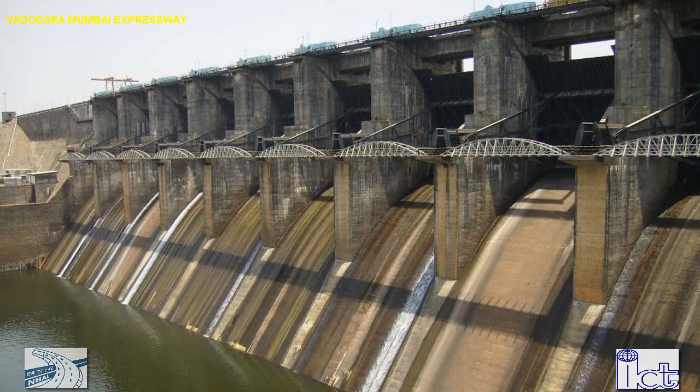Dadra Nagar Haveli is a union territory with immense tourism potential. It has in the vicinity the Madhuban Dam and Dudhni Lake, famous for water sports, and garden Van Ganga, popular with filmmakers.

Surat in Gujarat is at the heart of the world's diamond polishing industry, contributing billions of dollars to the Indian GDP, and houses many industries like Kribhco's mammoth fertilizer plant, Reliance petrochemical plant, Essar's 10 million ton steel plant, L&T's heavy engineering unit, gas processing plant of ONGC, etc.

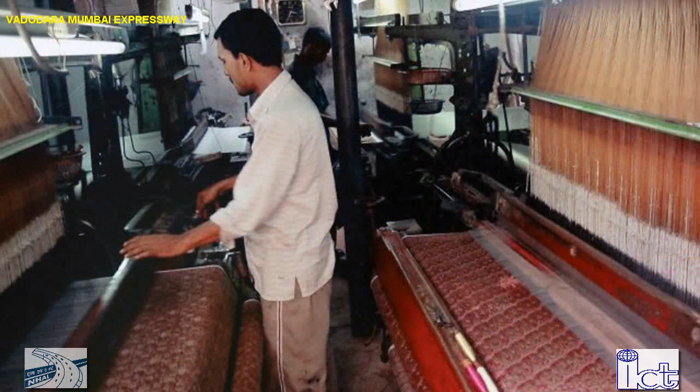Bharuch is a heavily industrialized city and is renowned for its textile mills, chemical plants, long staple cotton and dairy products. Gujarat's biggest liquid cargo terminal is situated here. It also houses many reputed multinational companies like Videocon, BASF, Reliance, Welspun Stahl, etc.

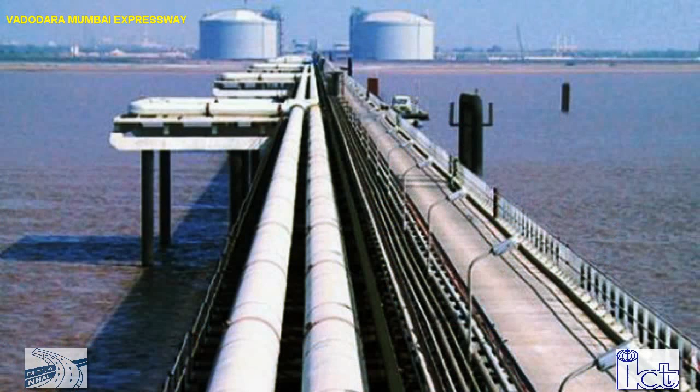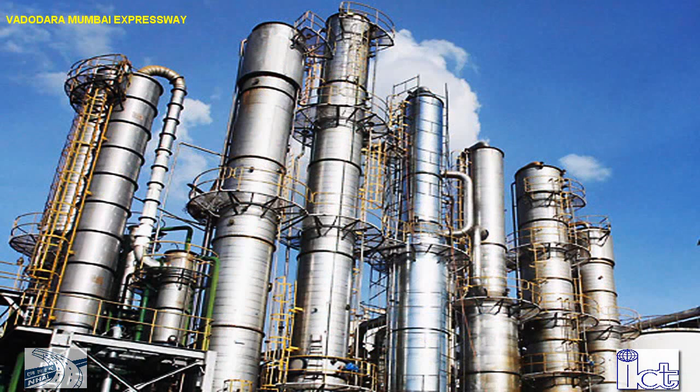Vadodara is a major hub of petrochemical industries in the country. It houses the Gujarat Refinery of IOC, the Gujarat State Fertilizers and Chemicals and Indian Petrochemicals Corporation Limited. Ahmedabad is a thriving centre for chemical and pharmaceutical industries. Two of the biggest pharmaceutical companies of India, Zydus Cadila and Torrent Pharmaceuticals, are based in the city.

The Jawaharlal Nehru Port, which is the largest container port in the country, is located here. The Dahej Port is an all-weather port with a capacity to handle 22 million tons of cargo per annum, which is being further expanded. The industrial activity in this busy region is all set for a major impetus with the planned Delhi-Mumbai Industrial Corridor. Delhi-Mumbai Industrial Corridor has been conceived as a model industrial corridor of international standards, with emphasis on expanding the manufacturing and services base and developing it as a global manufacturing and trading hub.

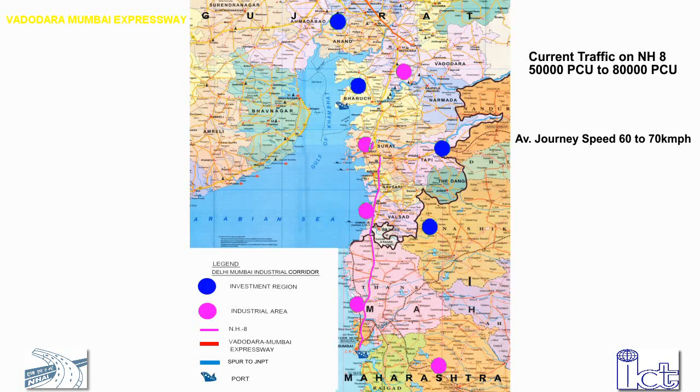In this major industrial hub, NH8 connecting Delhi with Mumbai is the principal arterial carrying bulk of the traffic. The current traffic on NH8 between Mumbai and Vadodara is in the range of 50,000 to 80,000 PCUs with an average journey speed of 60 to 70 km per hour. The NH8 is not access controlled and is operating at level of service B or below even after widening to 6 lanes. With the planned industrial development in the region, the traffic on NH8 is expected to grow manifold, and hence the region will need an alternate route to carry large volumes at high speeds.

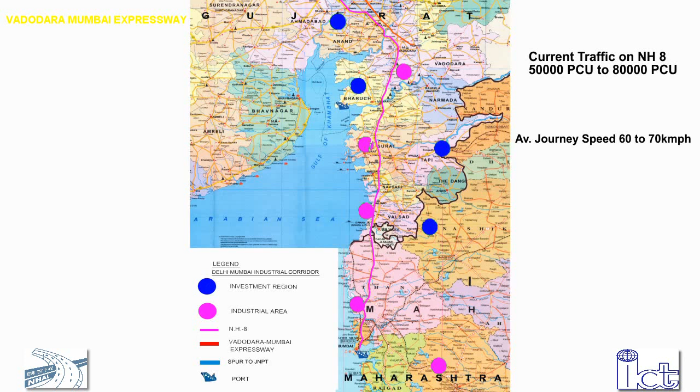To this end, NHAI is planning to build the Vadodara-Mumbai Expressway along with spur to JNPT under NHDP Phase 6. The alignment of the expressway and spur passes through Thane and Raigad districts in Maharashtra, Union Territory of Dadra Nagar Haveli, and Valsad, Navsari, Surat, Bharuch and Vadodara districts of Gujarat. The alignment in Gujarat is mostly within the 600-meter corridor frozen by the government of Gujarat for the expressway.

The alignment of the spur is in conformity with the outer alignment recommended in the Comprehensive Transport Study conducted by Mumbai Metropolitan Regional Development Authority, and the alignment has been approved by Government of Maharashtra. The spur connects the main expressway to JNPT and Mumbai-Pune Expressway. Therefore, the traffic bound for JNPT and Pune will ply on spur and not enter the Mumbai city, reducing both traffic congestion and pollution in the city. The expressway with spur is linking already existing Ahmedabad-Vadodara Expressway with Mumbai-Pune Expressway and thus will provide expressway connectivity from Ahmedabad to Pune.

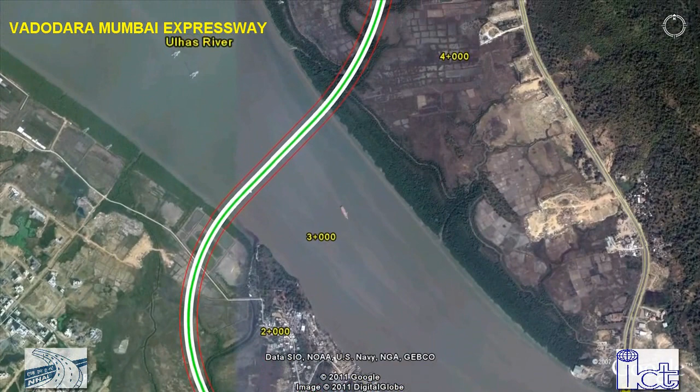The proposed Vadodara-Mumbai Expressway is 379 km long and its alignment is parallel to NH8. It starts from kilometer 499 of NH8 in Dahisar and traverses the Mira Bhayandar municipality before crossing Ulhas River at kilometer 3.0 in Thane district. The length of main expressway in Thane district is about 112.8 km.

It passes through dense habitation in Vasai from kilometer 16 to kilometer 21. Though a 100-meter corridor has been earmarked for the expressway in the master plan of Vasai, developed by CIDCO, large-scale encroachment has happened in the earmarked right-of-way and there may be considerable public resistance to the project in this section. The connection to Vasai is provided through an interchange on Vasai-Virar Road.

The spur to JNPT takes off at kilometer 27 and the expressway crosses river Vaitarna at kilometer 31. The alignment then moves parallel to Vaitarna river, avoiding the reserved forest on both sides. It crosses Vaitarna river again at kilometer 45 and thereafter moves parallel to Surya river before crossing it at kilometer 68.

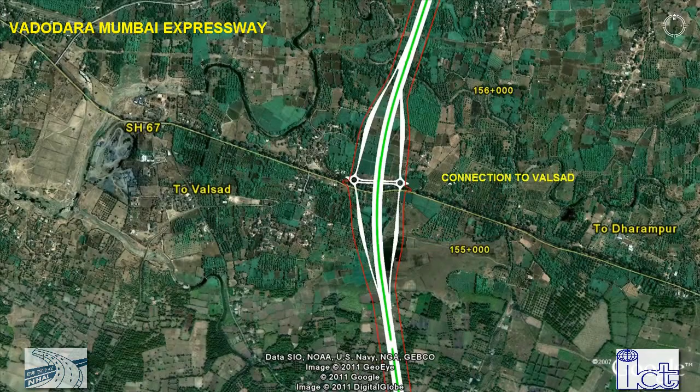The alignment again enters Valsad district at kilometer 124 and bypasses the town of Vapi on its east side. The total length of the expressway in Valsad district is about 48.6 km. The alignment crosses Par River at kilometer 149, about 2 km east of the existing bridge on NH8. Alignment thereafter moves parallel to NH8 on its eastern side and crosses Valsad Dharampur Road in kilometer 156. A diamond type interchange is proposed at this crossing to provide access to Valsad town and the adjoining area.

The alignment crosses Auranga River at kilometer 159, about 4 kilometers east of existing bridge on NH8. Alignment thereafter moves away from NH8 and enters Navsari district at kilometer 167. The total length of the expressway in Navsari district is about 37 kilometers. The alignment crosses river Kaveri at kilometer 178, just a kilometer east of Chikli town.

The alignment thereafter moves just about 1 to 1.5 kilometer east of NH8 and crosses Gandevi Tankhal Road at kilometer 190. An offset type interchange is proposed at this location to provide access to Navsari and adjoining region. The alignment crosses Ambika River in kilometer 193 and moves further northwards and crosses Purna River in kilometer 205. Thereafter, the alignment enters Surat district and the total length in this district is 57 kilometers.

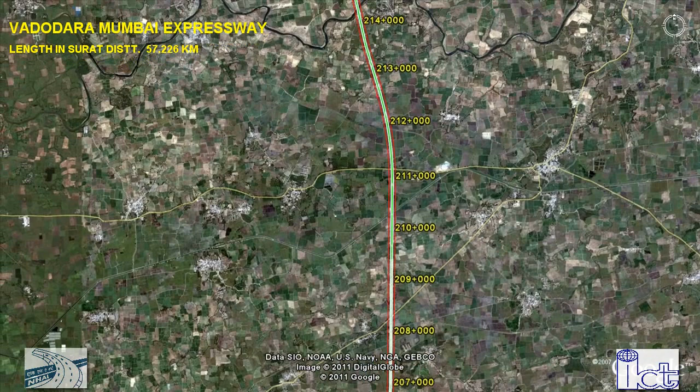Alignment moves 7 to 8 kilometers east of NH8 before crossing the under construction new NH6, that is, the Surat-Bardoli highway just east of Eenaville. An offset interchange is proposed at this location to provide access to Surat, Bardoli and adjoining area. Alignment crosses existing NH6 with a flyover. It moves northwards and crosses Tapi River in kilometer 237, about 9 kilometers east of Kamrej.

Thereafter, the alignment moves northwestwards and crosses NH8 at kilometer 254. An offset interchange is proposed at 257 to give access to Kosamba, Kim and the adjoining area. Alignment crosses the proposed dedicated freight corridor of railway at kilometer 258 and goes further north on the west side of Kosamba town. Thereafter, the alignment enters Bharuch district at kilometer 262.5 and is 8 to 10 kilometers west of NH8.

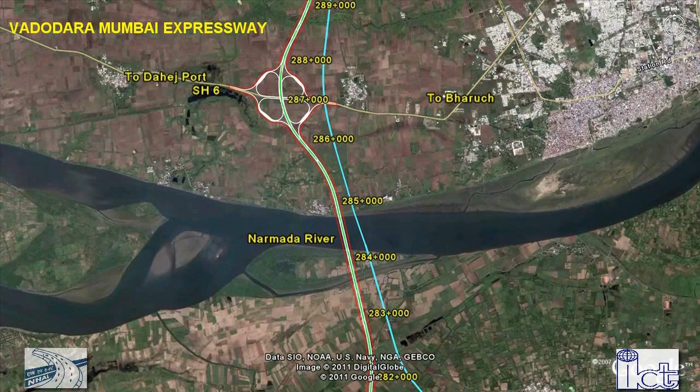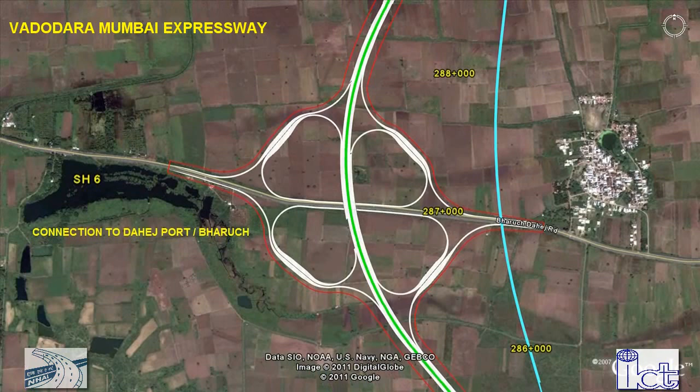Kilometer west of Ankaleshwar town before crossing river Narmada in kilometer 285. It crosses the Dahej-Bharuch road at kilometer 287, about 4 kilometers west of Bharuch. A full Cloverleaf type interchange is provided on the Dahej-Bharuch road to give access to Bharuch town and the Dahej port. Thereafter, the alignment moves 11 to 12 kilometers west of NH8. The alignment enters Vadodara district at kilometer 324 and the total length in this district is 54.5.

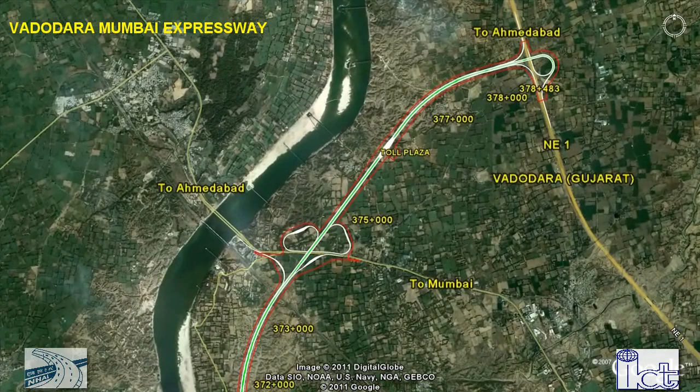It crosses Padra road at kilometer 353.5 where a partial Cloverleaf is proposed to give access to Padra and Vadodara towns. Thereafter, the alignment is 4 to 5 kilometers west of Vadodara town up to kilometer 366. It crosses the proposed dedicated freight corridor at kilometer 361. After kilometer 368, the alignment moves parallel to the Mahi River. It crosses NH8 at kilometer 374, where a partial Cloverleaf type interchange is proposed to give access to Vadodara and adjoining area. The alignment ends at kilometer 80 of the Ahmedabad-Vadodara Expressway NE1 with a Trumpet type connection.

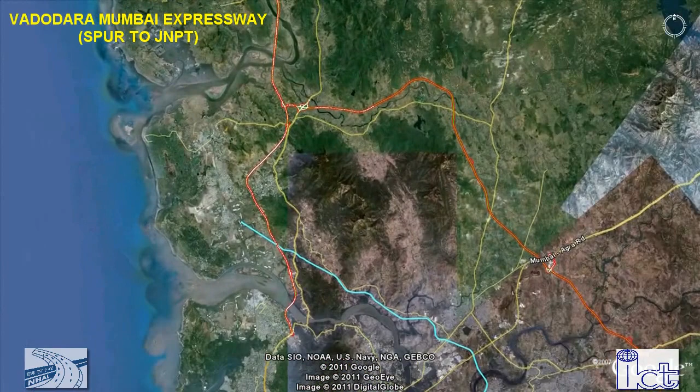The spur alignment takes off from kilometer 27 of the main expressway near Vasai of Thane district and moves eastward. The length of spur in Thane district is about 74.2 kilometers. It crosses NH8 at kilometer 2 where a partial Cloverleaf type of interchange is proposed. The alignment crosses Tansa river at kilometer 3.4 and moves eastwards between the river and the Tungareshwar Bird Sanctuary. It crosses Tansa River again at kilometer 19 and then moves southwards.

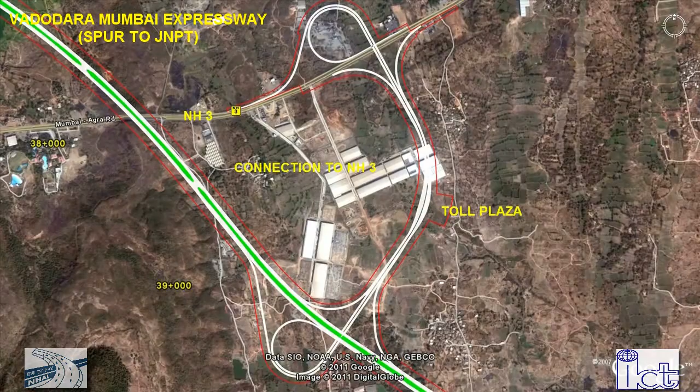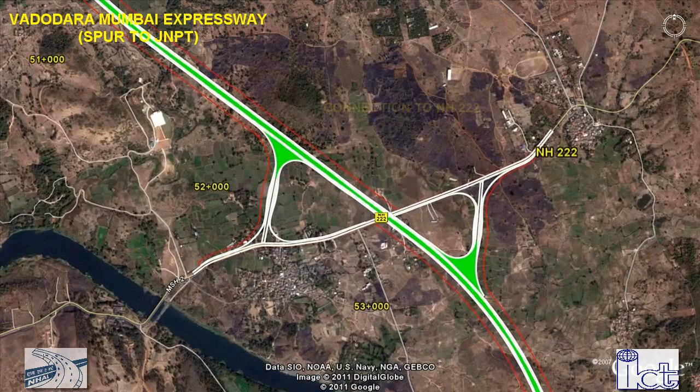It crosses NH3 at kilometer 38, about 8 km west of Bhiwandi. An offset type interchange is proposed at this location to give access to Bhiwandi and adjoining area. The alignment moves southeastwards crossing Bhatsa, Kalu rivers and NH222 about 8 km east of Kalyan. A partial Cloverleaf type interchange is proposed at the crossing of NH222 for access to Kalyan. Thereafter, the alignment moves parallel to Ulhas River on the eastern side and traverses east of Badlapur and crosses Ulhas River at kilometer 67.

The alignment enters Matheran Hills at kilometer 72, wherein a 4.4 km long tunnel is proposed. The alignment enters the Raigad district at kilometer 74.2 and moves southwards in plain terrain and crosses Mumbai-Pune Expressway at kilometer 90.5. A partial Cloverleaf interchange is proposed at this location for access to Mumbai and for the traffic to and from Pune. The alignment further traverses southwestwards crossing two railway lines and NH4 and ends at NH4B connecting to JNPT. A Trumpet interchange is proposed at the end providing access to JNPT.

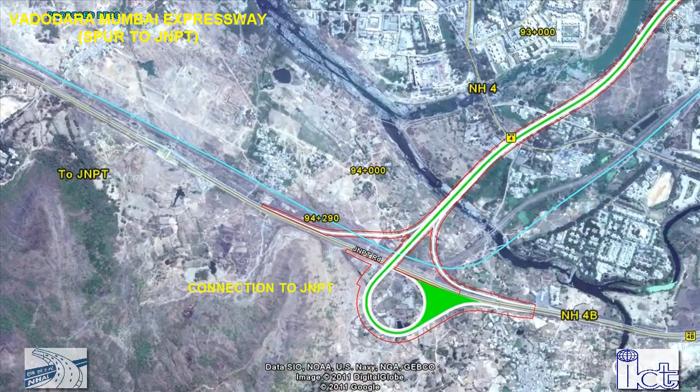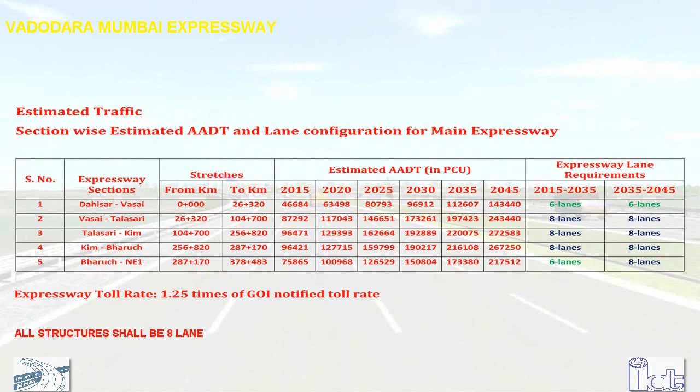The traffic on majority of the expressway sections in the opening year is expected to be in the range of 45,000 to 90,000 PCUs, while major length of spur is expected to carry 40,000 to 45,000 PCUs. Based on the traffic estimates, the expressway is proposed as 8-lane facility from Vasai, that is kilometer 27, to Bharuch, that is kilometer 287. The rest of the expressway and the entire spur are proposed as 6-lane facility. All structures shall however be built as 8-lane in the beginning to avoid their future widening.

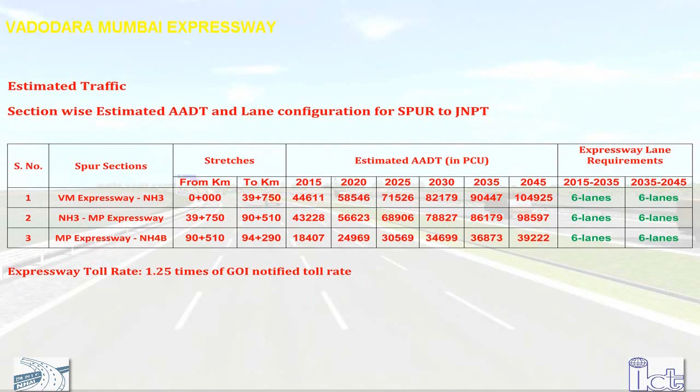These traffic estimates are based on a toll rate of 1.25 times the Government of India notified toll rate. Sensitivity analysis shows that the traffic and the revenues decrease if the toll rate on the expressway is increased further. The expressway has been designed for a design speed of 120 km per hour as per the guidelines for expressways issued by MoRTH. The international standards like AASHTO of USA and the standards used in the country for the operational or under construction expressways have also been taken into consideration while finalizing the design standards.

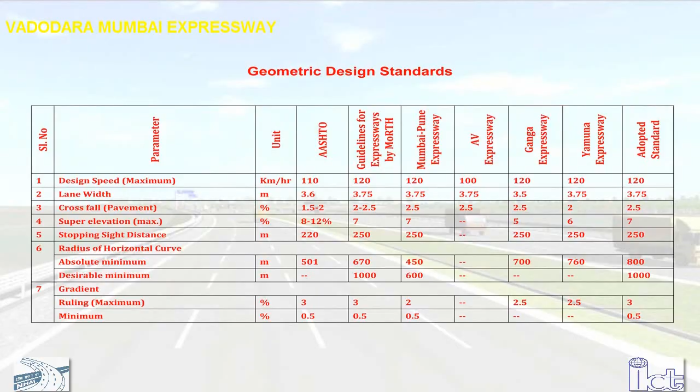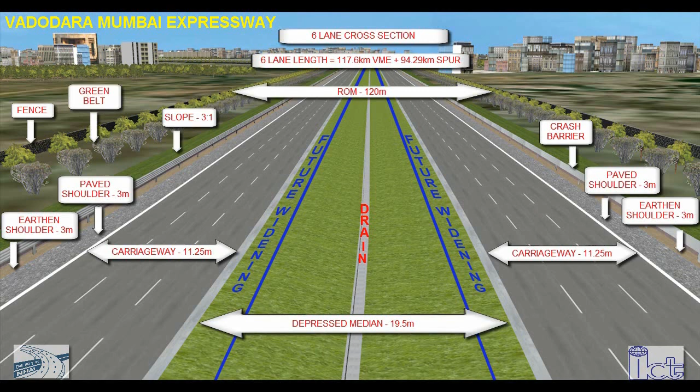The proposed 6-lane cross-section has a depressed median of 19.5 meter width and carriageway of 11.25 meter width, paved shoulder of 3 meter and an earthen shoulder of 3 meter width. A wider median is provided for future widening to 8 lanes inside the median. The total ROW proposed is 120 meter, which includes a green belt of 15 meter on either side. The proposed 8-lane cross-section will have a median width of 12 meter and carriageway width of 15 meter.

For the pavement of the expressway, apart from the standard flexible and rigid pavement, other options like flexible pavement incorporating semi-rigid layer like cement-treated base and flexible pavement incorporating a reinforcing layer of 3D geocell have been studied. Based on the life cycle costing analysis, rigid pavement has been recommended for the entire length of the expressway and the spur.

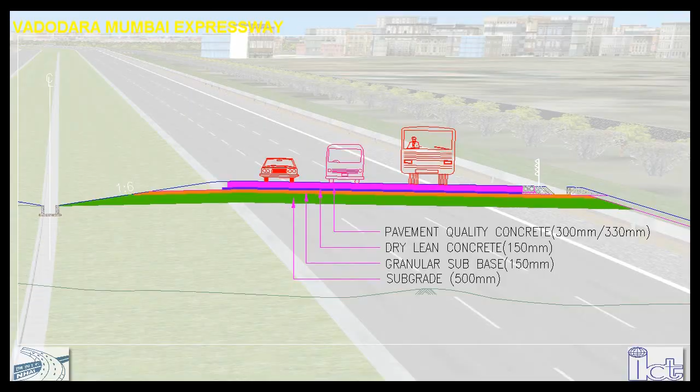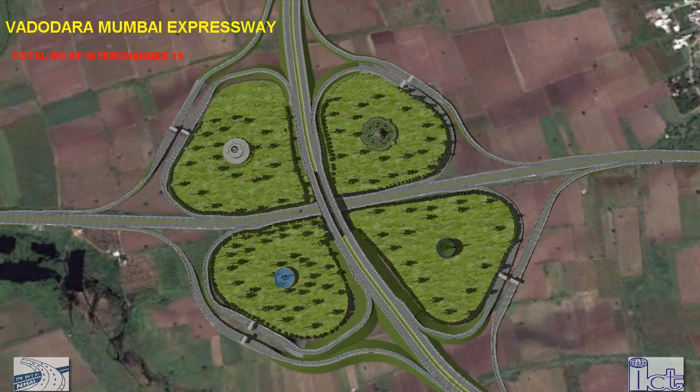The expressway has been provided with 13 interchanges while the spur has been provided with 6 interchanges for smooth, safe entry and exit of the traffic. These interchanges have been designed for a design speed of 50 to 60 km per hour and adequate auxiliary lanes have been provided for smooth merging and demerging. The expressway will have a closed tolling system and therefore the road user will register at entry and pay on exit. Hence, all the entry and exit ramps of the interchanges will have toll plazas except at the start and at the end where mainline toll plazas have been planned.

Trumpet type interchange has been provided at T crossings like the one at the start point on NH8 in Dahisar. Diamond type interchange has been provided at locations where the anticipated right turning traffic is not substantial, like the interchange in kilometer 156 on Valsad-Dharampur road.

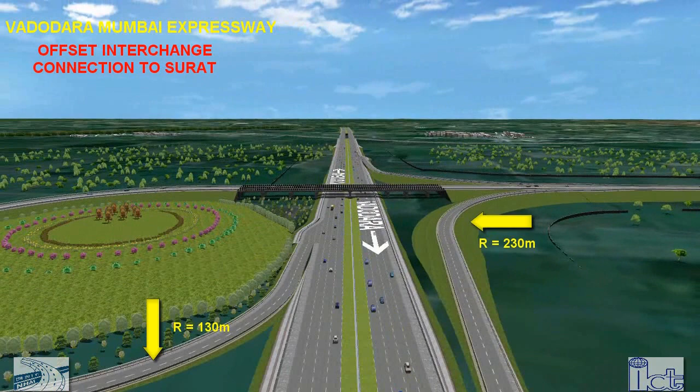Offset interchanges consisting of combination of two trumpets have been provided at locations where it is not possible to provide interchange at the crossing of the expressway due to built-up conditions, like this interchange on new NH6 near Ina village for connection to Surat. The offset interchange will need only one toll plaza for entry and exit. A full Cloverleaf is planned on Bharuch-Dahej road, which will provide connection to Bharuch city and Dahej port.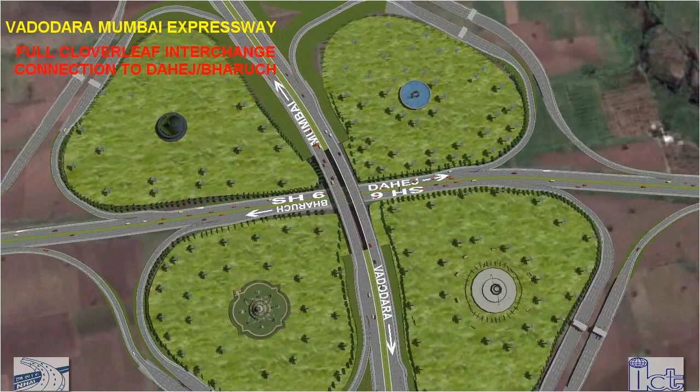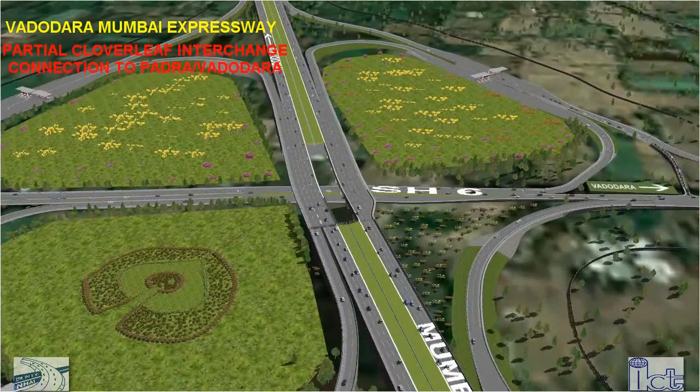Cloverleaf type interchange has been planned at the Padra road crossing at kilometer 354, which will provide connection to Vadodara city and Padra town. The loop in the southeast quadrant has not been provided due to built-up area on this side, and a right turning at grade ramp has been provided in northeast quadrant. A trumpet type interchange is proposed with NE1 providing connection to Ahmedabad.

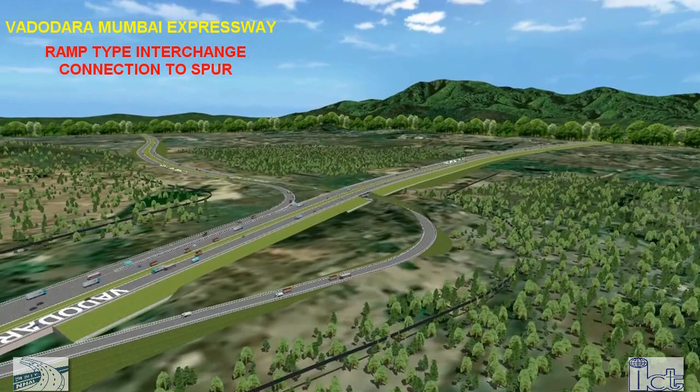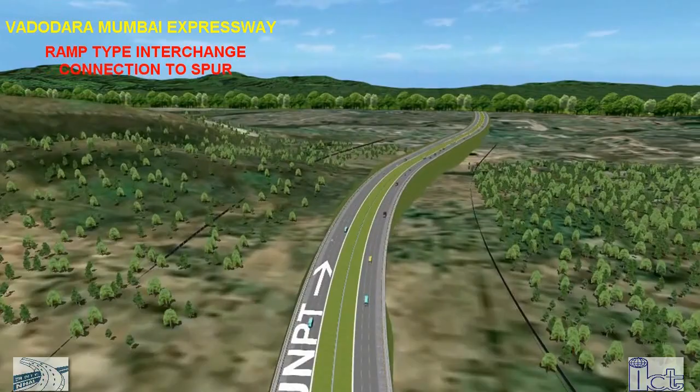A left out and right in ramp type interchange is proposed at the start of the spur from the expressway. Due to built-up conditions at the crossing of the expressway with NH3, an offset type interchange is proposed at this location. This will provide connection to Bhiwandi and Nasik.

At the crossing of the Mumbai-Pune Expressway, a partial cloverleaf is planned with loops for Mumbai-bound traffic and for traffic coming from Pune.

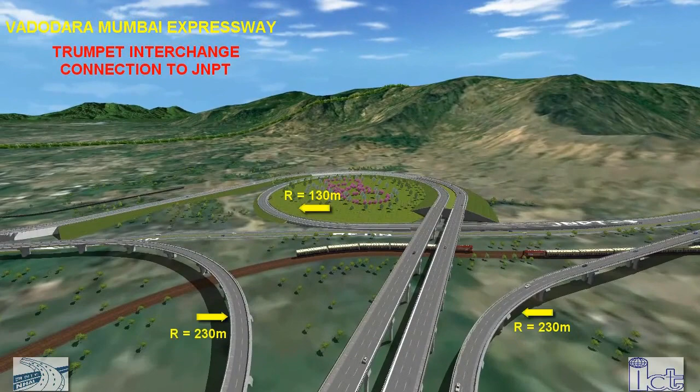The section between Mumbai-Pune Expressway and NH4B shall be elevated due to many crossings of road and rail and restricted ROW in urban area of Panvel. A trumpet interchange is proposed at the end of the spur with NH4B which connects to the JNPT. It will also involve crossing over the proposed dedicated freight corridor bound for JNPT.

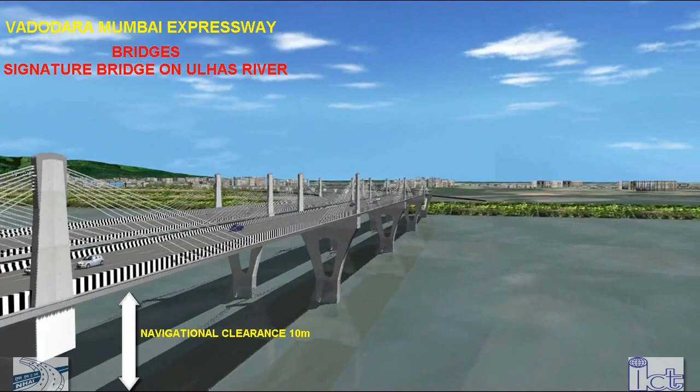There are 49 major bridges and 144 minor bridges in the expressway and the spur. Generally, single long span or continuous superstructure has been provided. In the case of major bridges across Ulhas and Tapi River, extradosed type PSC box superstructure with 3 central spans of 120 meter have been proposed along with 45 meter span PSC box with segmental construction for viaduct portion.

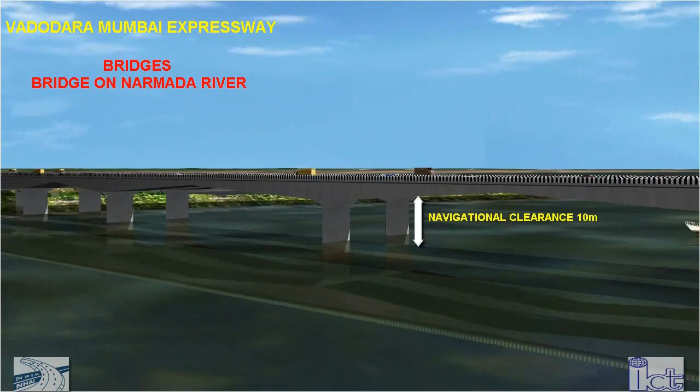In the case of bridge over Narmada River, PSC box type superstructure with cantilever construction with 2 units of 3 central spans of 120 meter for main river portion and 45 meter span PSC box with segmental construction has been proposed for viaduct portion. For Ulhas, Tapi and Narmada rivers, a vertical clearance of 10 meter above navigational HFL has been provided as per the guidelines of Inland Waterway Authority.

The tolling system proposed for the Vadodara-Mumbai Expressway along with the spur shall be closed tolling system. Hence the user will register at entry and pay at exit, thus paying for the exact distance travelled. There shall be 13 interchanges with 33 toll plazas on the expressway and 6 interchanges with 8 toll plazas on the spur. The user can enter and exit the expressway only from these plazas.

For standard lanes, cash plus smart card, the road user shall be issued a ticket at the entry and shall be required to pay at the exit. For electronic toll collection ETC express lanes, the vehicles shall be allowed to drive through at expressway speeds.

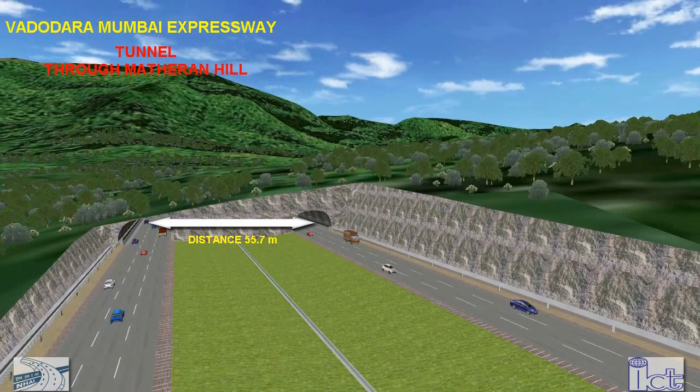The spur alignment crosses Matheran Hills where it is proposed to construct a 4.4 km long twin tube 6-lane tunnel across Western Ghats between km 71 to km 76, about 15 km northeast of Panvel and 20 km southeast of Kalyan. The unidirectional tunnel tubes are aligned parallel at spacing of about 55.7 meter from center line of one tube to center line of another tube.

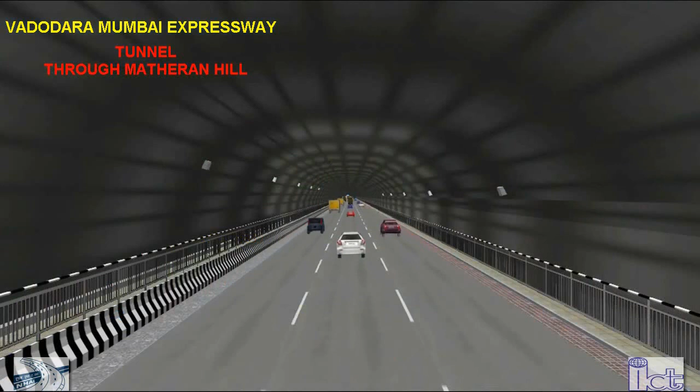2 D-shaped straight tunnel tubes are proposed to be excavated about 15.7 meter width and 8.8 meter height for 6-lane traffic. Laybys are also required to be provided at interval of 750 meter inside the tunnel for breakdown conditions. Single lane staggered emergency exits for connecting the 2 tubes are also provided at spacing of about 750 meter.

The tunnel will be provided with proper ventilation using exhaust method. The entire tunnel length will be equipped with luminaires for adequate visibility inside the tunnel. Walkway has been proposed for maintenance staff. The expressway and the spur cross railway lines at 12 locations where rail over bridges have been proposed.

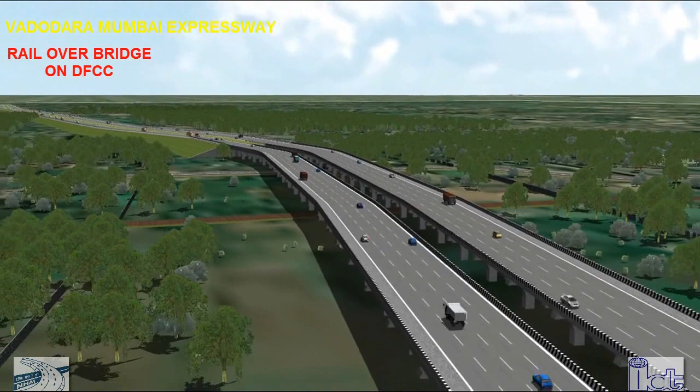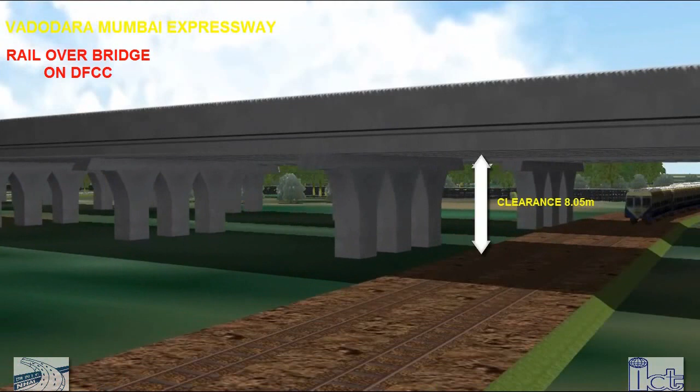At the crossing of local roads, grade separation has been proposed with a flyover, overpass or an underpass for smooth cross flow of the traffic. It crosses the dedicated freight corridor at 5 locations where a vertical clearance of 8.05 meter has been provided as per guidelines of DFCC.

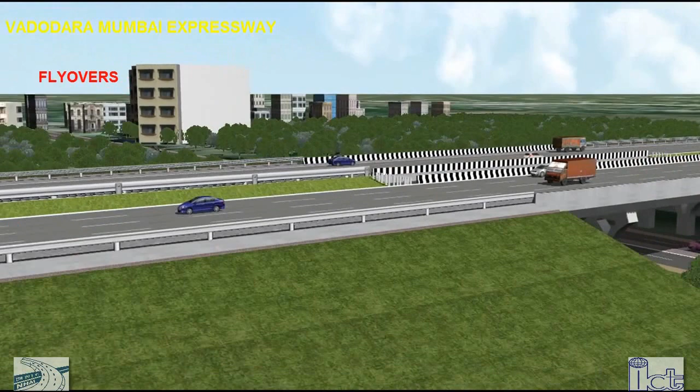A total of 31 flyovers have been proposed where the expressway crosses over the existing state highways. Taking into account the future widening of the state highways, the flyovers have been typically provided with 3 spans with a central span of 30 meter and obligatory spans of 15 meter with vertical clearance of 5.5 meter.

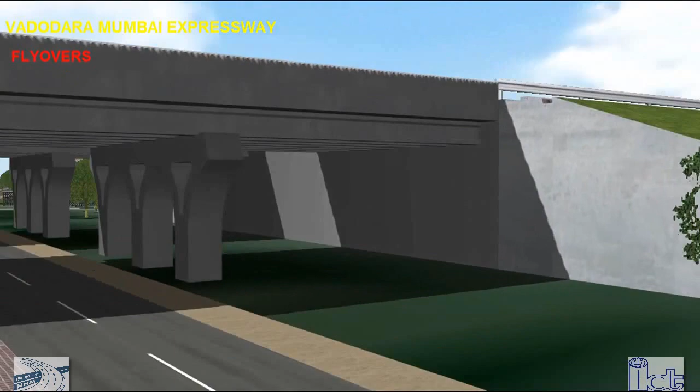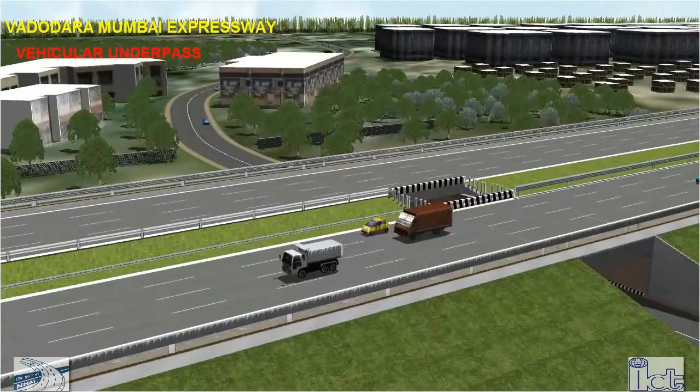A total of 23 overpasses have been proposed where the expressway crosses under the existing state highways. These have been provided with 2 spans of 40 meters and a vertical clearance of 5.5 meter. On major district roads and other district roads, vehicular underpasses of span 12 meter and vertical clearance of 5.5 meters have been provided. A total of 89 such VUPs have been provided.

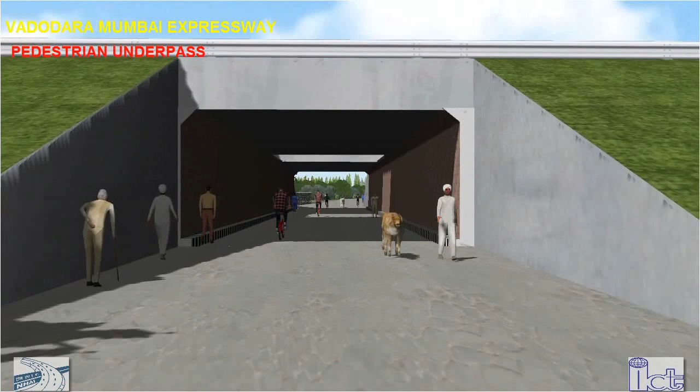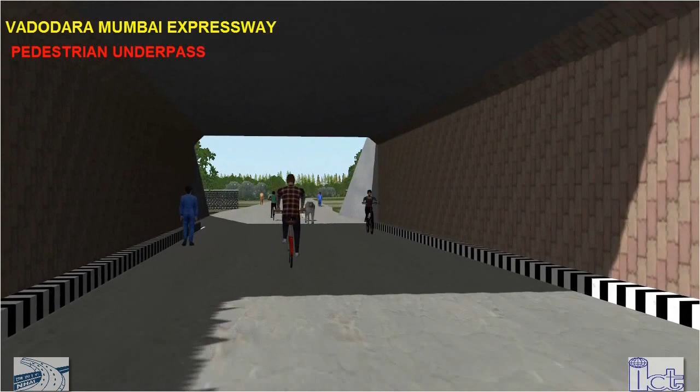On smaller village roads, pedestrian underpasses have been proposed with a span of 7 meter and vertical clearance of 3.5 meter. The roads where underpasses have not been provided have been connected to the nearest underpass by service roads for movement of local traffic across the expressway. Service roads have also been provided in the urban locations like the Vasai-Virar region and the Dadra Nagar Haveli to facilitate movement of traffic across the proposed expressway. The total length of service roads is 57 km.

Since the expressway is a greenfield alignment and is access controlled, therefore it will be bifurcating the communities and farming land on either side. 266 cattle underpasses of span 5 meter and vertical clearance of 3 meter have been provided at regular interval. These will not only serve as passage for field canals for irrigation purposes, but also serve as balancing culverts in the rainy seasons.

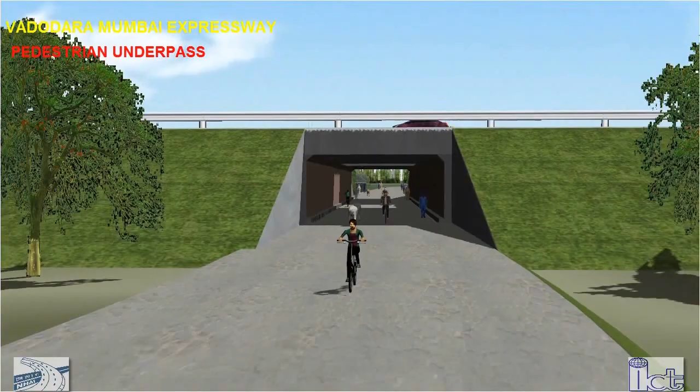Emergency crossovers have been provided for emergency, law enforcement and maintenance operations. These crossovers have been provided at 5 km interval. The crossover consists of a 35 meter wide median opening with barrier post.

To mitigate the traffic noise in built-up areas, noise barriers have been proposed at critical locations to avoid any inconvenience to residents of nearby properties. The ROW of the expressway shall be fenced to avoid any future encroachments and to prevent stray animals entering the expressway.

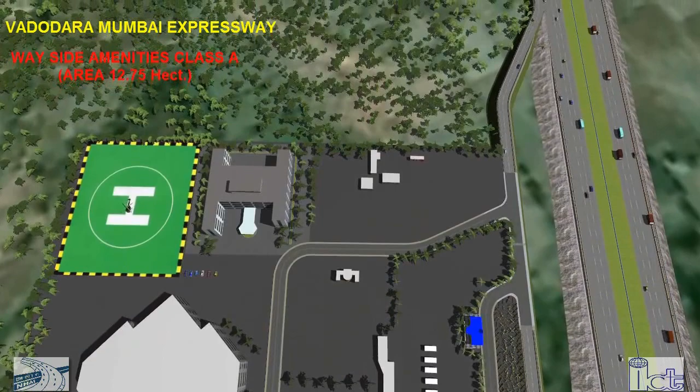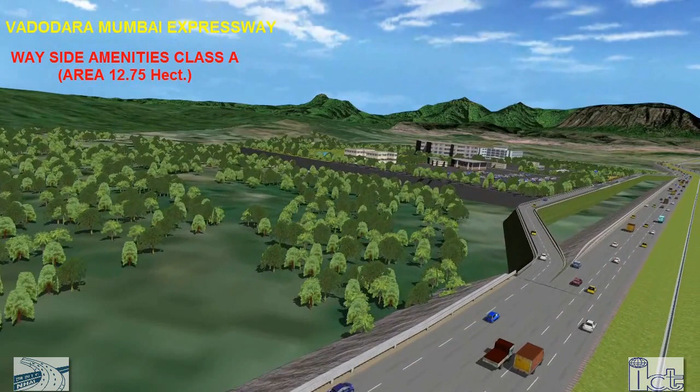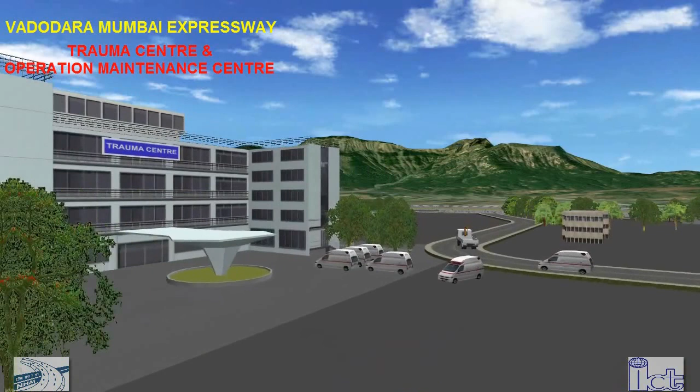There shall be two types of passenger wayside amenities. Type A shall be of larger size of area 12.75 hectares and shall have restaurants, motels, fuel stations, recreation centers, etc. In addition, 6 operation and maintenance centers are proposed accommodating the traffic control center, offices for operation and maintenance staff, a trauma center, a maintenance base or yard with equipment and material for carrying out emergency maintenance, parking for rescue vehicles, cranes, etc., patrol vehicles, ambulances, rest places for personnel on night shift duty, a restaurant or canteen, etc.

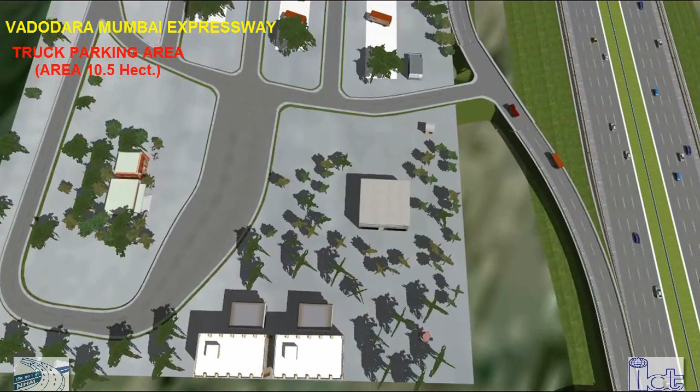In all 5 Type A wayside amenities, 11 Type B toilet cum car parking facilities have been provided. Type B shall be of smaller size of 0.075 hectares with only toilet and parking facilities. In addition, 5 truck parking facilities are proposed on each side of the expressway and spur. These provisions are based on optimal considerations such that there will be one facility or the other within 40 km distance.

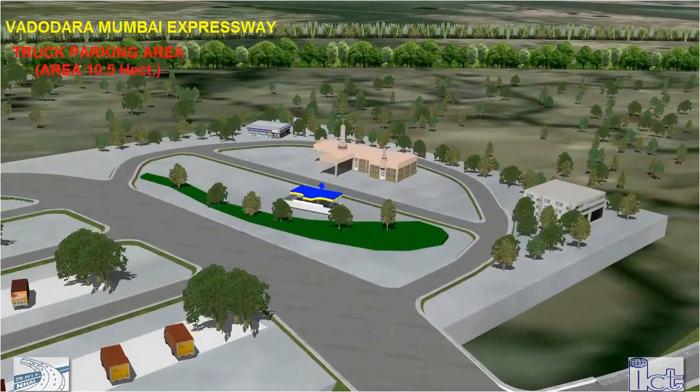At all interchanges, shoulder and gantry mounted advanced direction signs will be provided to provide information well in advance for safe exit out of the expressway. Absolute speed limit signs and compulsory no parking and no stoppage signs also have been proposed at regular interval. Variable message signs have been proposed for the expressway to convey real-time information on weather, traffic congestion and other statutory information required for safe travel.

The alignment of the expressway passes through reserve forest area in a length of about 16.14 km in Thane and Raigad districts of Maharashtra, which will need mitigation measures. There is no reserve forest in Dadra Nagar Haveli and Gujarat. The alignment also passes through Dahanu and Matheran eco-sensitive zones where mitigation measures shall be required. The alignment passes through designated Coastal Regulation Zones (CRZ) in a length of 7.64 km in Thane district and 2.175 km in Bharuch district.

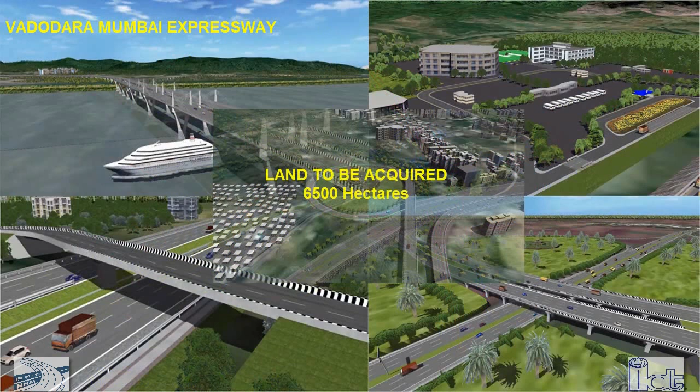For expressway and spur, about 6,500 hectares of land and about 2,700 structures will be required to be acquired. The alignment is passing through thickly built up area of Vasai Taluk in Thane district, which is a potential hotspot. The cost of civil works is about Rs 17,701 crores, which translates to a per kilometer cost of Rs 37.43 crores. The total cost of the project is about 25,113 crores, including the cost of land acquisition and other pre-construction activities.

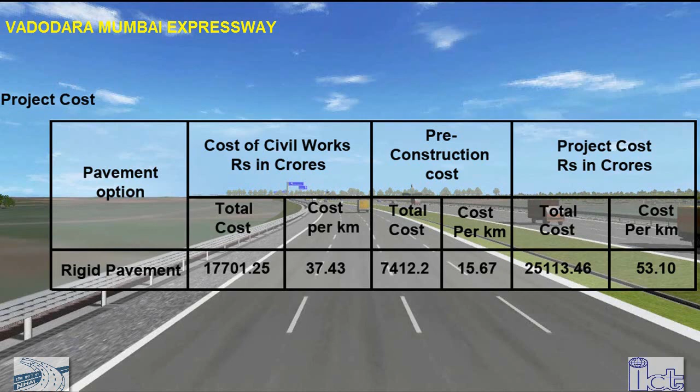The financial analysis has been carried out based on the traffic and the toll rates commensurate to 1.25 times the Government of India notified toll rate for a concession period of 30 and 40 years. The project is financially viable without NHAI support for a concession period of 40 years.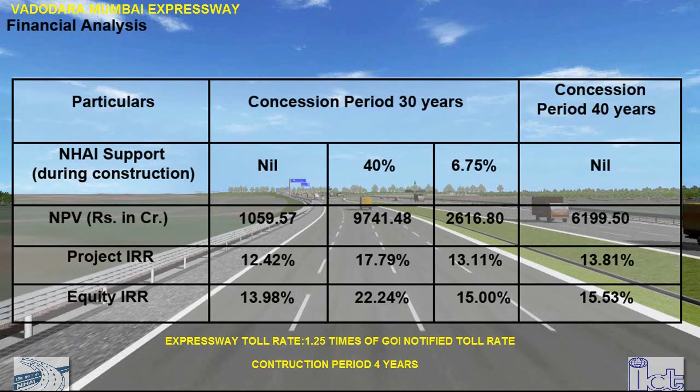Based on the traffic estimates and the volume to capacity ratios, it is recommended that the main expressway have 8 lanes from kilometer 26.320 to kilometer 287.170, while the remaining sections will be 6 lane in the opening year. It is further recommended that the section from kilometer 287.170 to kilometer 378.620 will be widened to 8 lanes in the year 2035, while the section from 0 to kilometer 26.320 will stay 6 lane till 2045. Therefore, the main expressway will be a 6 to 8 lane facility. The spur is recommended to be a 6-lane facility throughout the 94-kilometer length.

After carrying out study of toll rates on existing roads and based on toll sensitivity analysis and financial analysis, it is recommended to charge a toll rate of 1.25 times the basic notified rate without taking into account the additional toll for structures. To minimize delays to the through traffic, a closed type tolling system is recommended with toll plazas at the entry and exit of the interchanges. Mainline toll plazas are recommended only at the start and at the end.